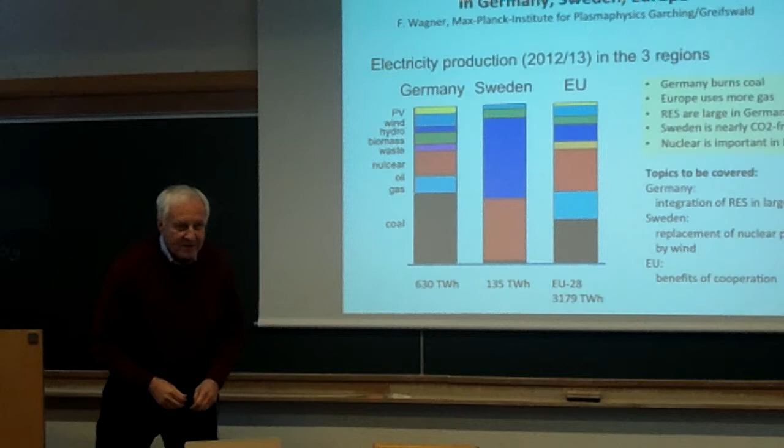In order not to disqualify myself in this seminar, I also would like to talk about EROI. EROI in the sense of energy, renewables, CO2, and intermittency. The original title I had prepared was the use of intermittent sources for electricity production in Germany, Sweden, and also Europe. So these are the three regions I would like to cover.

And here you can see the usual splitting. The 630 terawatt hours of German production is split up in coal, gas, nuclear, and so on. And this is the situation of Sweden, and this is then Europe. And what we can see is Germany burns coal. Europe uses more gas. Renewables are large in the case of Germany here. Sweden is nearly CO2 free because it combines nuclear and hydro, and then biomass. And nuclear is also fairly important in Europe.

And the topics I would like to cover are integration of renewable energies in large scales, at the example of Germany. Sweden, can one replace the nuclear power by wind? And Europe, what is the benefit of cooperation? A rather up-to-date topic.

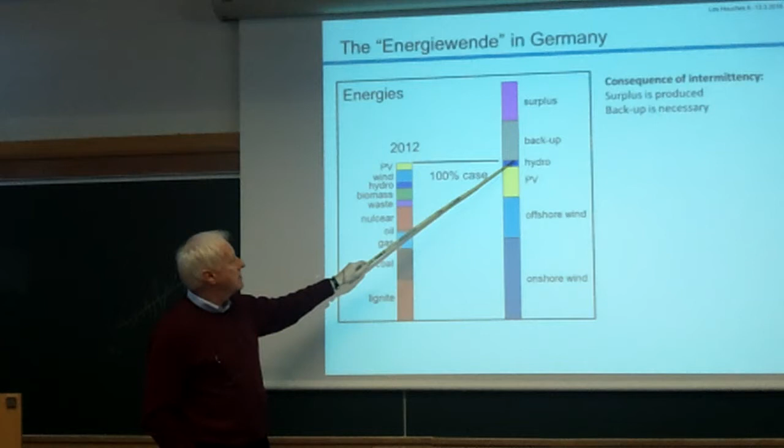So now let me turn to Germany, and of course everything goes under the headline Energiewende. This is again the situation I have shown you before. Now lignite and hard coal are split up. This is sort of the 100% case. And now this situation should be changed in the sense that we only use renewables. So we have onshore wind, offshore wind, photovoltaic. Hydropower cannot be changed very much in Germany. This is the level which, because I don't know it better, I just leave constant at the moment.

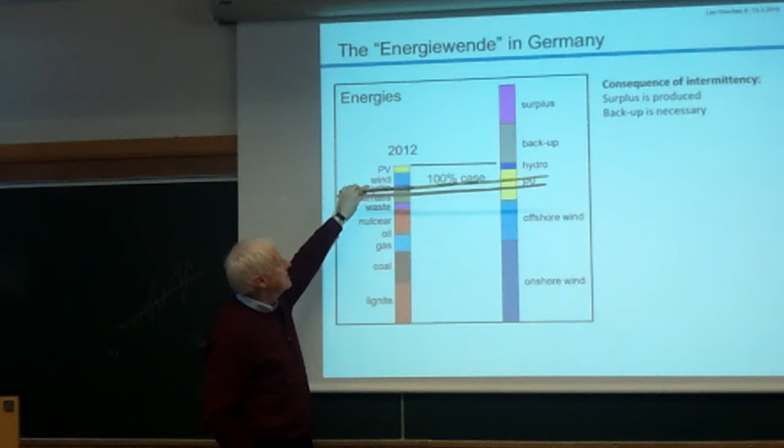And as these sources are intermittent, they will not always be present when needed. Therefore, we need a backup system. And then, if this is the 100% case, when I have voids, of course at other times I am producing surplus, so I have backup and surplus to consider under these circumstances. It has no scale, but it's in itself on scale.

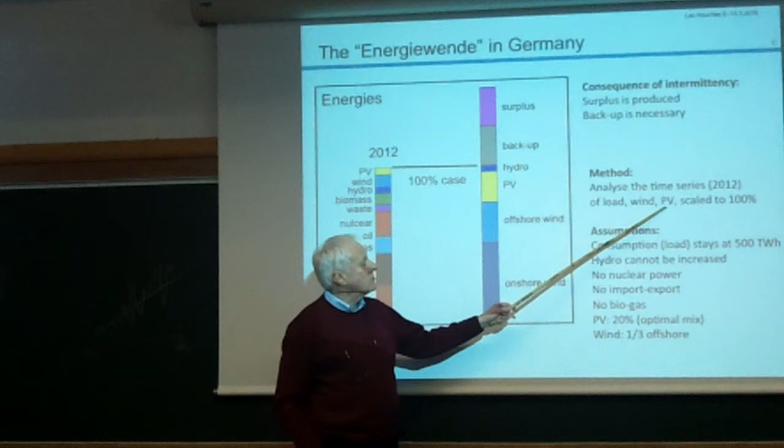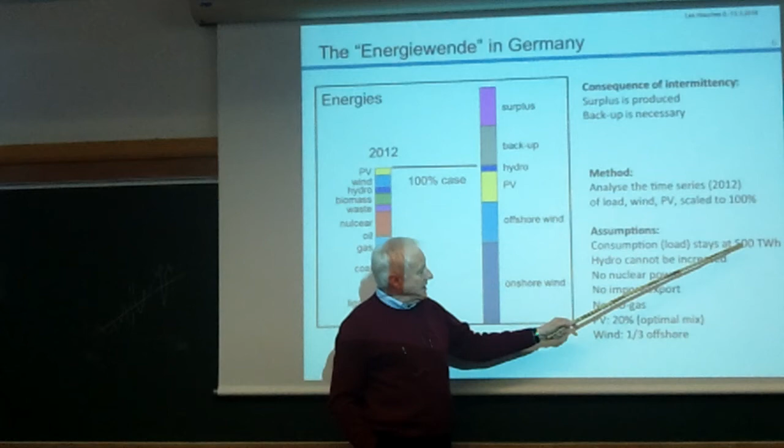The method, how I calculate those things in absolute terms, and you will see them in a minute, is I just use time series. I use the time series of 2012 for Germany, of the loads, wind, photovoltaic, and I just scale them to 100%. So photovoltaic and wind should produce the net electricity, around 500 terawatt hours. So this is what I would like to produce. This is my 100% case.

Hydro cannot be increased. No nuclear power. I consider no import-export. No biogas, because I am of the opinion that biogas or bioenergy has to be used for transportation eventually. Lorries and maybe aviation. I assume that photovoltaic is 20%. This is what is called the optimal mix.

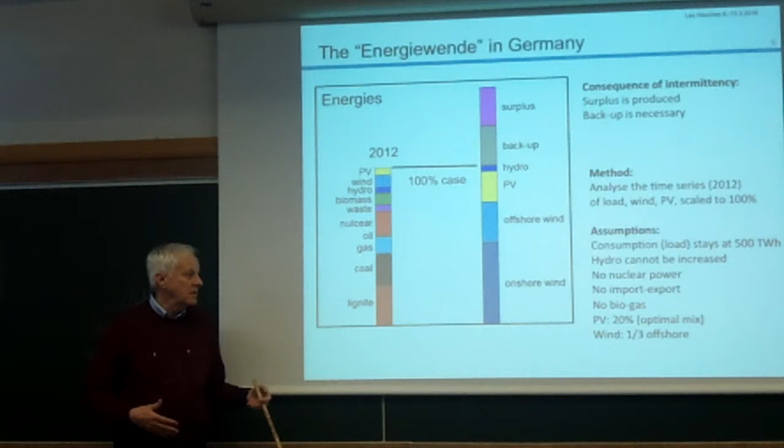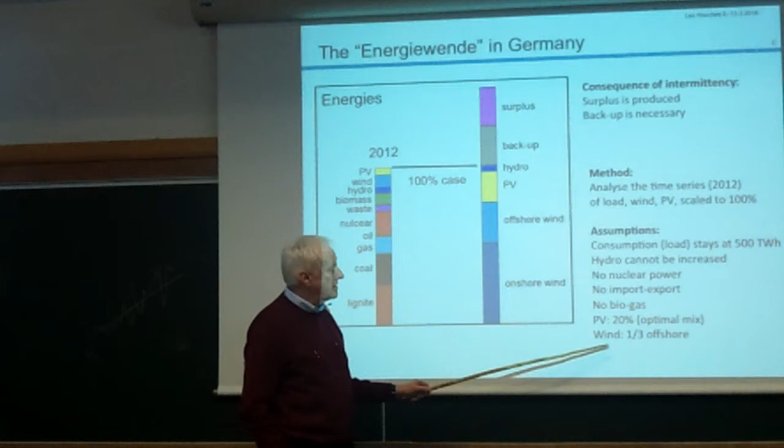So when you mix two time series, a periodic one which is photovoltaic and an erratic one which is wind, you can ask under what mixing conditions do I need the lowest level of backup? Then it comes to 20% photovoltaic, not more, in energy. Okay, arbitrary is the assumption in splitting between onshore and offshore wind. I assume that 1/3 is offshore. But this only enters at the end in the question, how much power do I have to install? Otherwise, it doesn't play a role.

So the major results are now when you ask simple questions, how much power has to be installed? Enough to serve Europe on good days. So when the sun is shining and the wind is blowing, with what we need for Germany alone, we could, on those days when the load in Europe is low, serve all of Europe. So the onshore wind is 176 gigawatt, offshore and photovoltaic. So this has to be installed for Germany to have, in my definition, the 100% case.

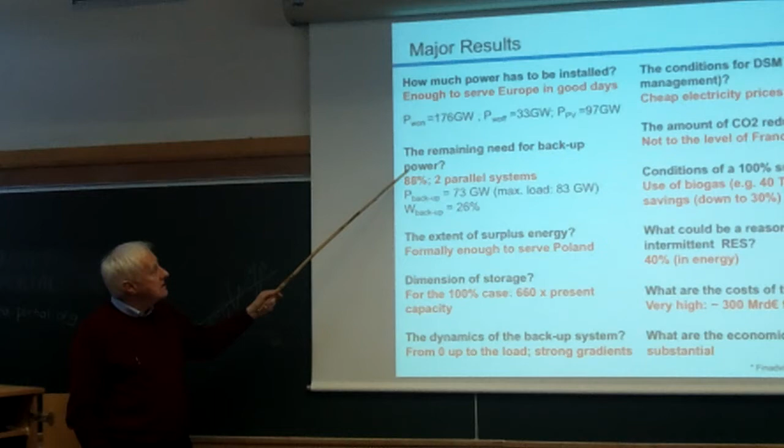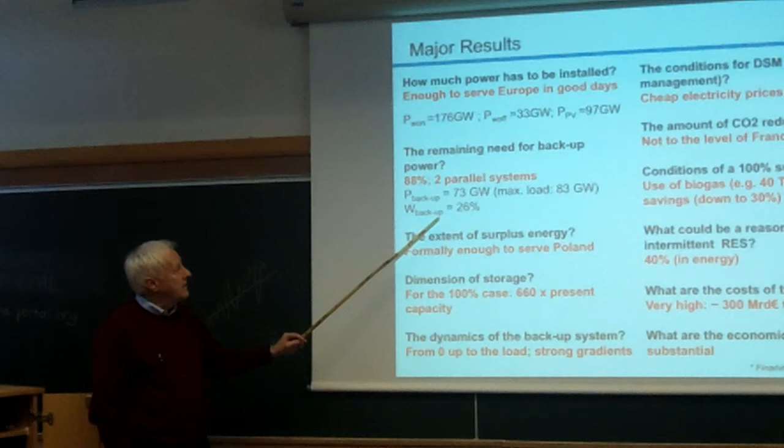But because we need a backup system, since we don't always have these good conditions, how much is the power of the backup system? It has to be 88% of what we have at the moment. So it is not that this drops to a very low value. Quite the opposite. We have to operate two parallel systems. So the backup power, which we need in addition to those, is 73 gigawatt. The maximal load in Germany is 83 gigawatt. And the backup energy on the other side is low. It is only 26%.

The extent of the surplus energy which is produced under these circumstances is, formally, enough to serve Poland. So it has a strong economic value, of course. Dimension of the storage: if we would like to get rid of the backup and replace it by a CO2-free storage, then for the 100% case, we need 660 times the present capacity which we have realized in Germany as

pumped storage. The dynamics of the backup system is totally different in comparison to the dynamics which these systems now have in operation, because now the dynamics goes from zero up to basically the load. So one has very strong gradients.

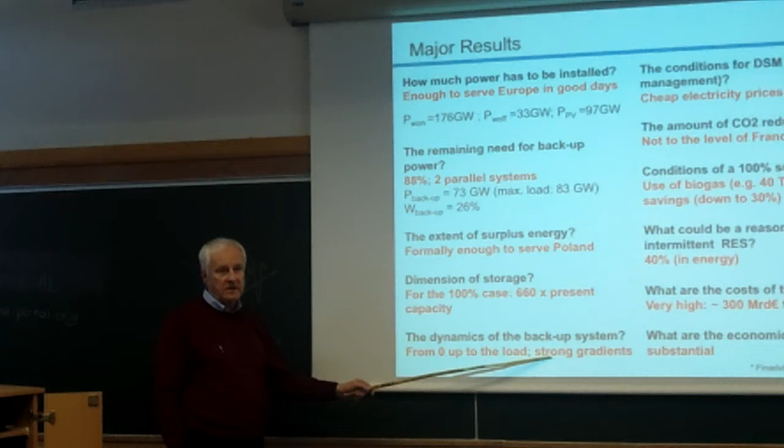The conditions for demand-side management: the cheap electricity price is during the day, not during the night. This is because of the 20% photovoltaic. So what you normally hear, that the clever housewife will have her washing machine switched on automatically during the night because one anticipates the price is low there, is wrong. Because of photovoltaic, the price is low during the day, which means that demand-side management drives us to utilize those periods where the economic activities are already large.

Or alternatively, the most obvious thing is to integrate Saturday and Sunday, because wind is blowing, sun is shining, we only don't consume so much. So let us consume so much and give up our weekly organizations. The amount of CO2 reduction under these circumstances of the 100% case is not to the level of France and Sweden, which enjoy the combination of hydro and nuclear.

The conditions for 100% supply by renewable energies, because many studies quote this possibility. This is the use of biogas, which I did not consider. In Germany, we have 40 terawatt hours now produced as biogas under circumstances where our biodiversity is already strongly, visibly reduced. But nevertheless, under these circumstances, you need drastic savings. Normally, people don't say savings, but rather efficiency improvement. This is more popular. Savings down to 30%, not by 30%, but down to 30%.

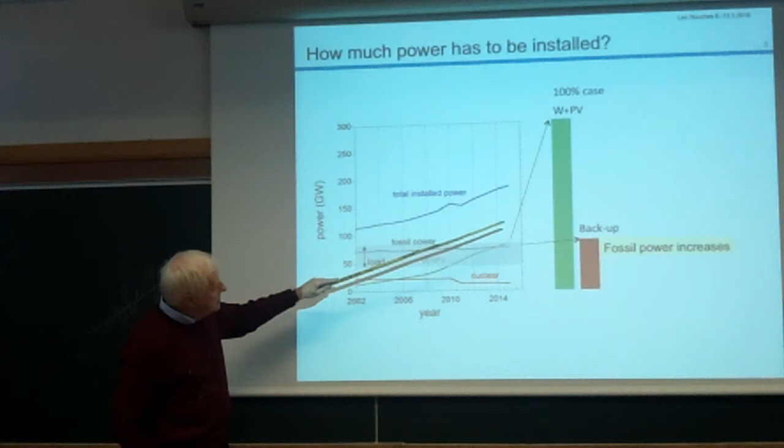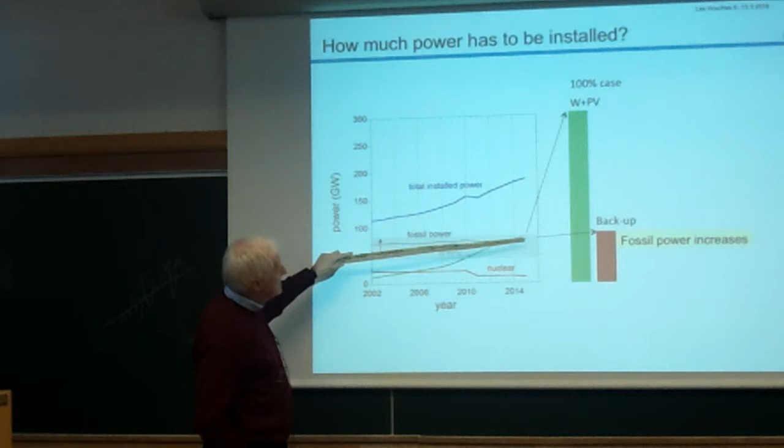And now you can see already that in the German case, the installed power corresponds to the peak of our load. So we have now something like 80 gigawatts, 40 gigawatts photovoltaic, 40 gigawatts wind. So this is tremendous. And it is already more than what we now have in fossil power. And this is the sum, the total installed power, which increases. This is the situation now where we get something like 20% from wind and photovoltaic.

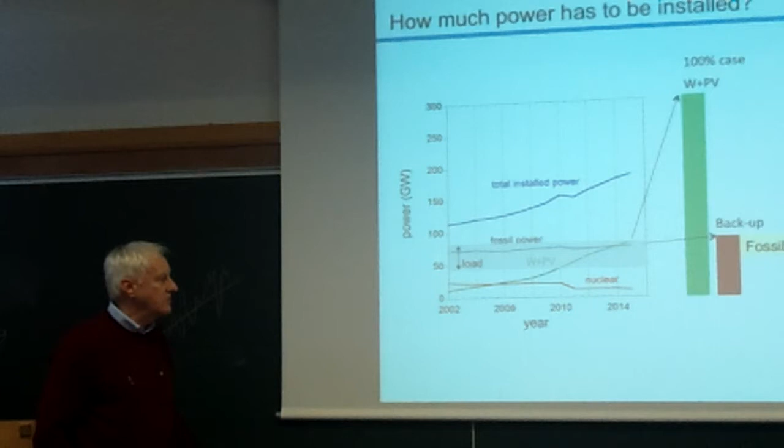But if you now scale up those two, because the rest, hydro and biomass, you cannot scale, then ultimately you must go from here to here. Then you have the 100% case. Then you produce this target, which is 500 terawatt hours, which I quoted. Very short. Yes, 100% is 100% of the electricity comes from renewables.

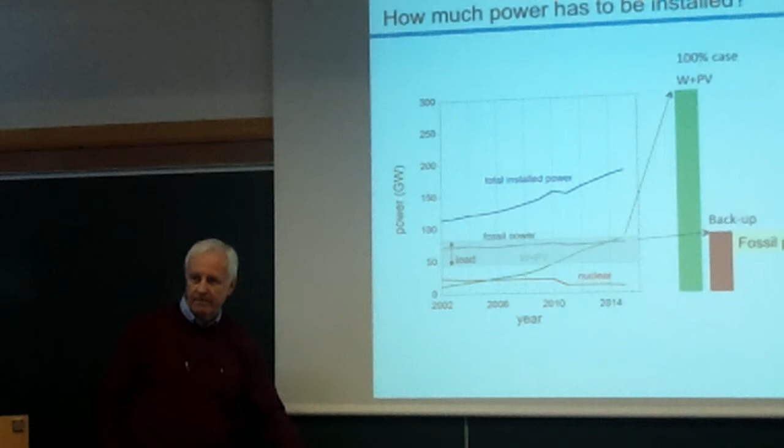Yes. So why do you need backup? Why is there fossil backup? Because part of this 100% is surplus. Okay, so you don't consume 100%. Yes, exactly. You export some. Or whatever you do with the surplus, we will come to this.

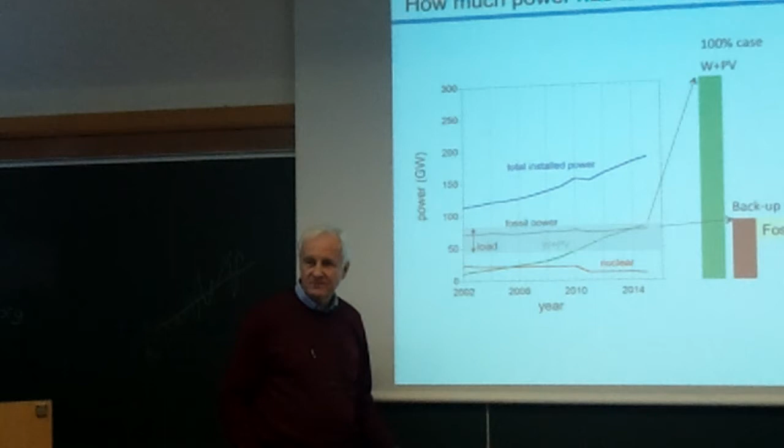Okay, so you need the backup in addition. So this is the 100%. So you need, for the 100% case, a power, I'm talking about gigawatts here, going from here to here. So despite the fact that we have already invested a lot, of course, we have not reached the real final destination. We still have to develop these things quite a bit. And in addition, we need, for the 100% case, still the backup system.

And it is interesting because we are switching off the nuclear. We have to ultimately increase the fossil power as long as we don't have any other possibilities, because we need more power than we have at present.

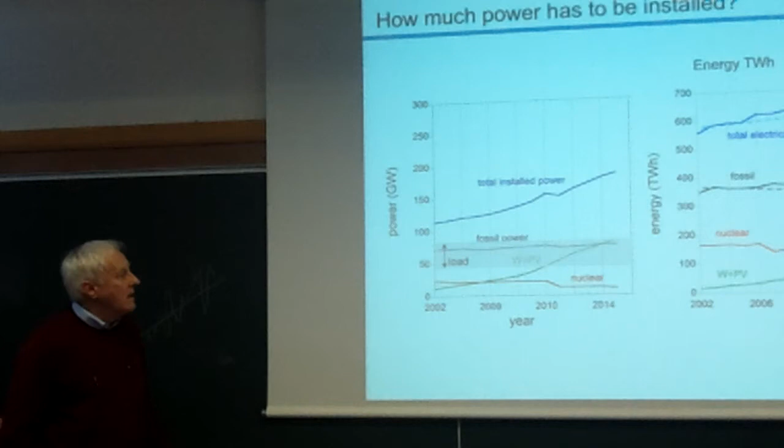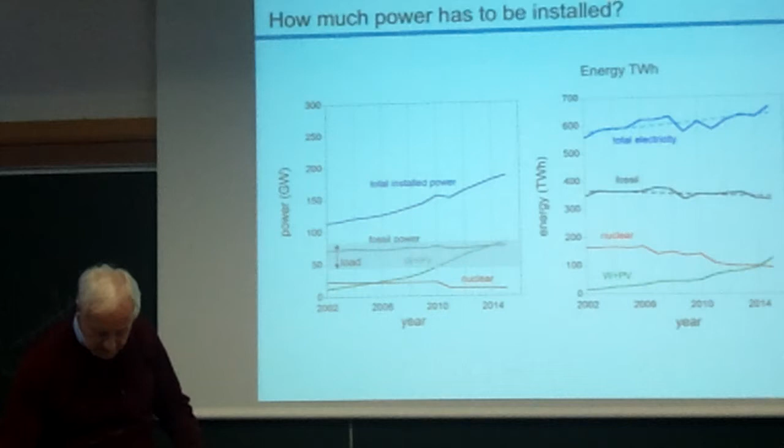This is now power, and this is the energy which we are producing. So when we look at the nuclear, it is continuously going down in energy. Wind and photovoltaic are continuously going up, and now we are producing more energy by wind and photovoltaic than by nuclear. The fossil energy contribution is slightly going down, but the total electricity consumption, so this is the total value. My reference value is 500 terawatt because of the net electricity, the consumed electricity, not the produced electricity. So this increases slightly.

Now the extent of surplus energy. So Germany exports, and this of course is not the surplus. It is just how the system operates in this intermediate phase where renewable energies are continuously added. Under these circumstances, the question is, can the fossil power stations now totally be switched off and regulate 100%? No, they cannot. There is always the issue for the operator to go through this calculation. Is it better to nevertheless run the coal-burning power station because it's more costly to switch it on again, and so on? So this all enters.

Sorry? This is all Germany. Germany. All Germany. At the moment I'm talking only about Germany. Okay.

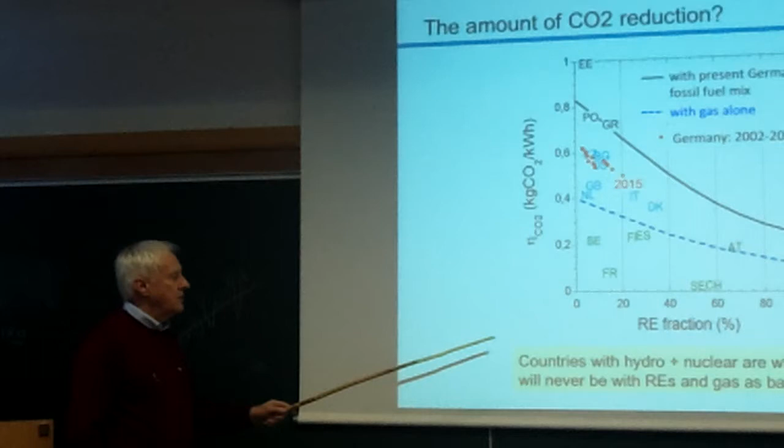Okay, so the next topic would be CO2 reduction. So this is discussed in terms of the specific CO2 production or emission for electricity production. So it is kilogram CO2 to kilowatt hours. And this is the renewable energy fraction. This is now, the black curve represents the German situation when we increase the renewables from 0 to 100%, utilizing now the mix which we have in lignite, coal and gas, disregarding nuclear energy.

So Germany is not there because thanks to nuclear energy we are down there, and thanks to renewables, now we move in this direction, we are 2015 here. But if we would replace nuclear energy by our conventional mix, we would follow along this line. When we now would give up nuclear but replace everything by gas, we would march along this line. When we look at what happens in Germany at the moment, thanks to the growth of renewable energies, we are walking down along this line.

And now, of course, when we go up to the 100% case, we ultimately should end there if the rest of the backup system is gas, or we end up here if the rest of the backup system corresponds to the present mix between coal and gas.

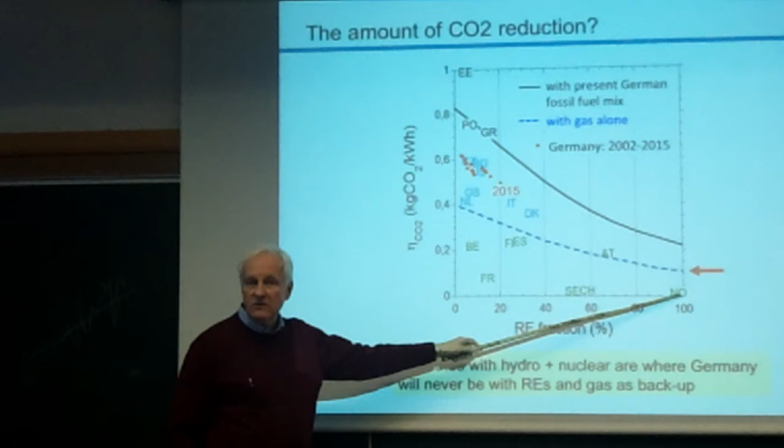Okay. Now when we look into others, this is Denmark, Belgium, and these are the interesting countries, France, Sweden, Switzerland and Norway. Now here we have 100% hydro, and here we have the mixes there. So Germany, with all the efforts to go to renewable energies and gas, will not be able, let me say, to meet the CO2 situation of those countries, which they have already now, because they can work with hydro or hydro plus nuclear.

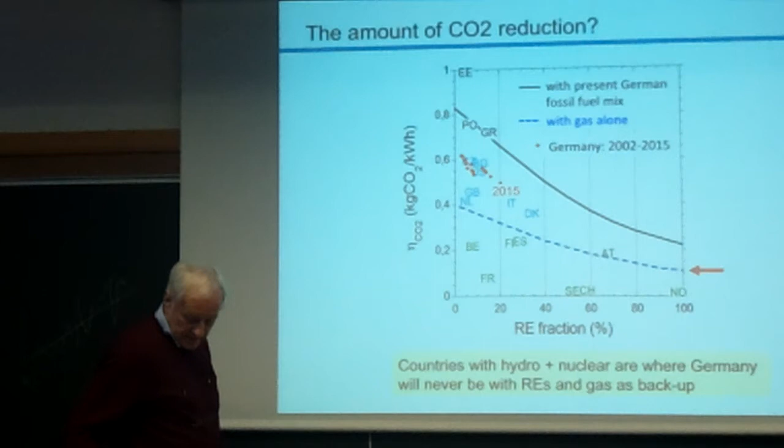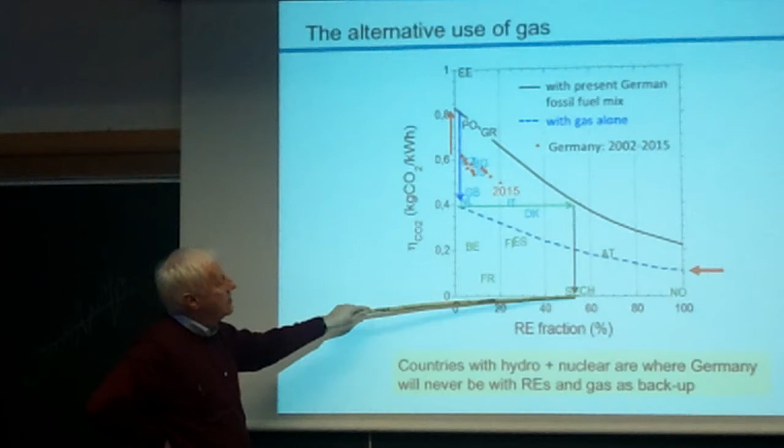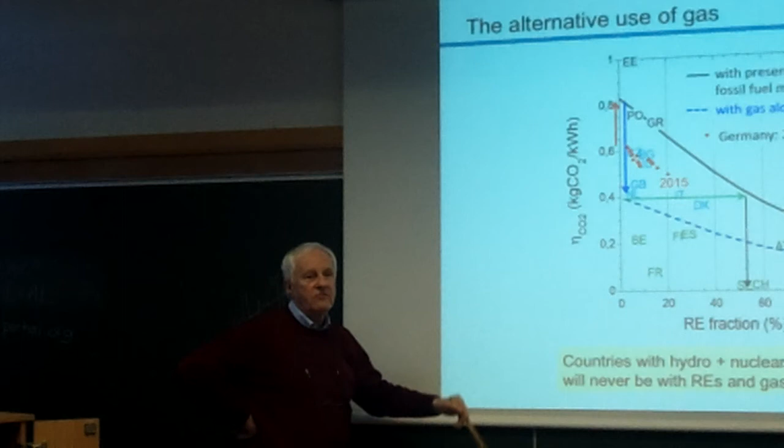Another aspect here one can see if one wants. If Germany, let me say, what we want to do, switch off nuclear, if we had done this right away, we would have marched up here. Now, if we had switched instead of coal to fully gas, we would march down here. So we would have ultimately reached a level which corresponds to the use of renewable energies up to a fraction of 50% or something like this. So the replacement of coal by gas is tremendous, corresponds to quite a substantial share of renewable energies. So this would have been an alternative.

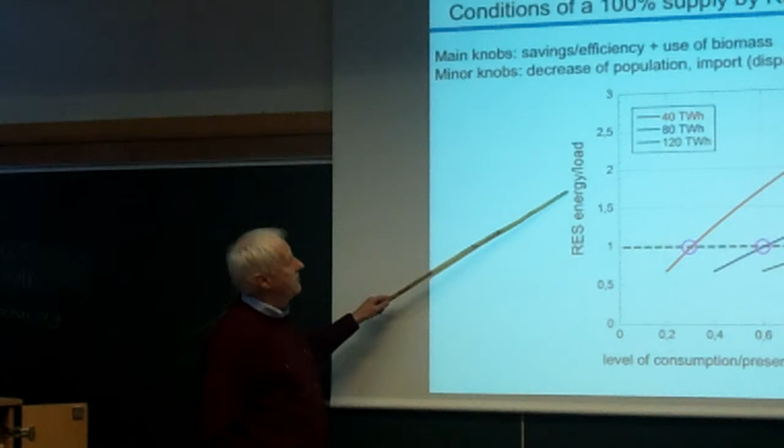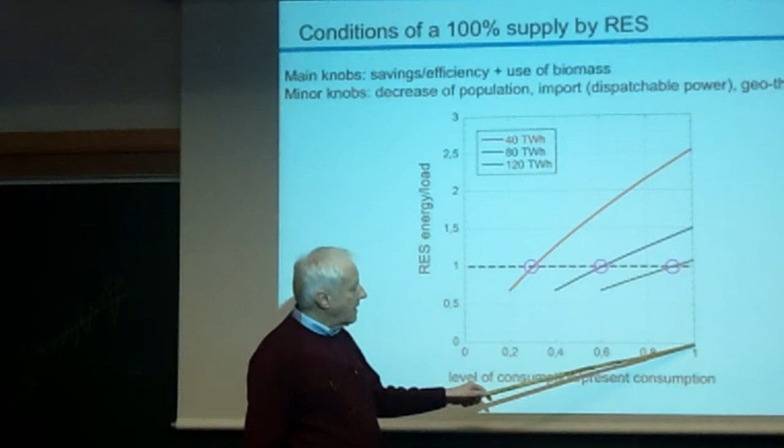Now the conditions for 100% supply. So 100% supply, now when I have the renewable energy divided again by the 500 terawatt hours, my load here, then I would sit here at 1. And here this is plotted against the level of consumption compared to the present consumption. So the present consumption is here, 1. And this is my parameter here, the use of biomass in the form of biogas to produce electricity.

So at present we have 40 terawatt hours in Germany. Then if we use this now to regulate the fluctuations which we have, then we can meet this point 1. The renewable energies indeed fulfill the load when we reduce our consumption down to 30%. When we double this, but then we need a colony to get the biomass, then let me say we only have to reduce to 60%. And only when we triple it, then we are where we are now.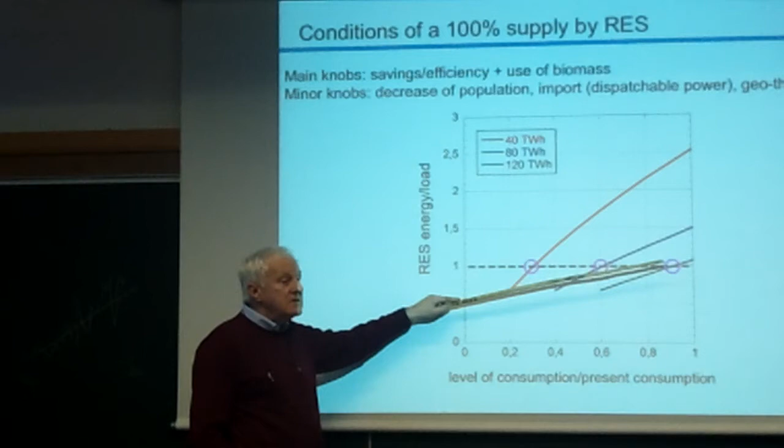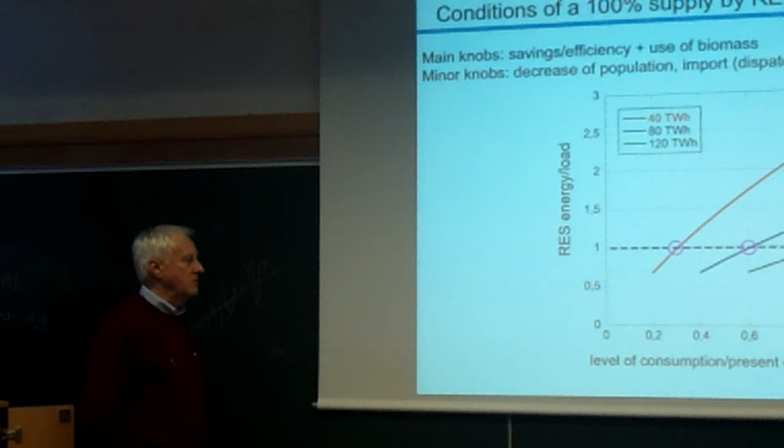Then if the dynamics of those systems would allow it, then with 120 terawatt hours, we would be able, let me say, to meet our consumption with renewables alone. Then you can say, of course, yes, okay, then let's just produce more renewables. And maybe then the situation is better.

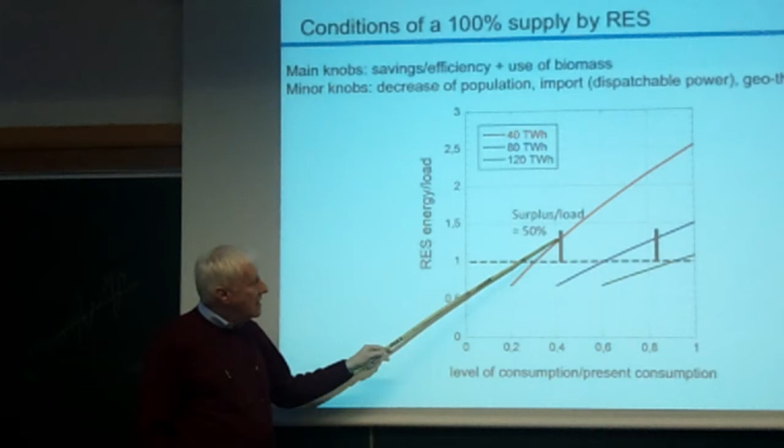So when I do this, then, for example, I have a special point here, because under these circumstances now, the surplus corresponds to 50% of the load. So I improve a little bit, I have not to be so ambitious in savings here or here, but nevertheless, very quickly, the surplus which I produce increases so much that I can think this must be an economic limit, where it just does not make sense to go beyond it.

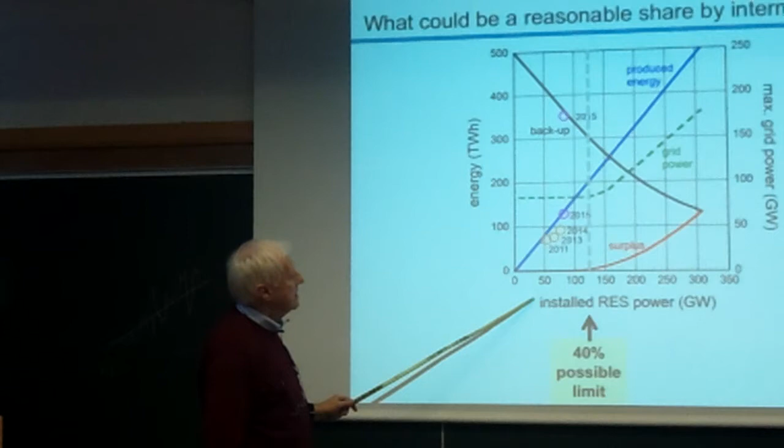Okay, so what could be a reasonable share by intermittent renewables? This shows now the energy which is produced. Here now we have the 500 terawatt hours, which is my goal. Here is the installed renewable energy power. This is now the produced energy against the power, which I assume is linear.

Of course, in reality, it will not be linear, because we will just not have these preferential sites for wind energy. If we would like to go to these values, we have to go deeper into the country where the wind does not blow as much. So in reality, this line will be non-linear, deviate from it. This is the variation over the various years, our installed power. So I said we are now at 80 gigawatt, and this is what we produce here.

Okay, now this is the backup system. Here we are at the moment. This is what we need. These are the calculated curves. And here is then the 100% case, where the backup and the surplus just meet, per definition. Okay, and now I can say, where do I think that circumstances become critical?

So here, shown on the right ordinate, the grid power increases with this share. And the surplus production increases. So here I have a technical problem, and here I have an economic problem. The economic problem is what to do with the surplus. So around this level, around 40% or something like this, the problems might start. Of course, this is very vague, but this is what I would deduce.

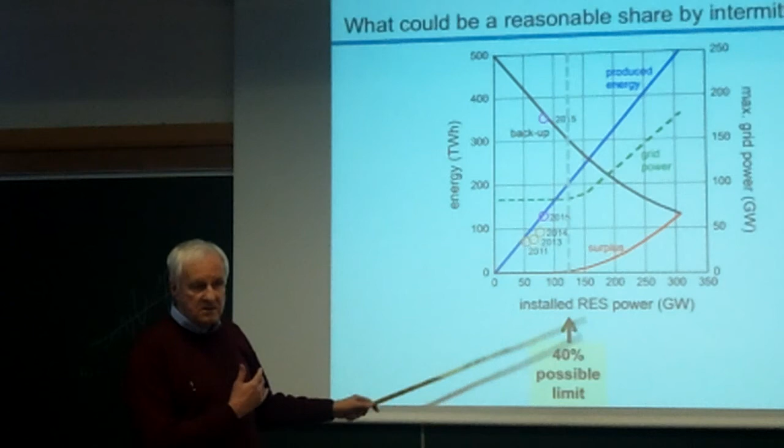When I look at the situation of Denmark, or maybe more critical the situation of Ireland, I can recognize that these problems indeed happen on days when they have something like 40–50% production. Ireland is more critical because Ireland is an island indeed, not hooked up like Denmark to another grid.

So the feed-in tariff for 2015 is 24 billion euros. This is a figure, and I'm very astonished that this figure is not discussed in detail, for example, in Germany. But when you compare it with other figures of relevance, for example, energy research in Germany, which, as far as it is publicly financed, is something like 800 million euros. So there's a large discrepancy. Our budget for research at all is 15 or 14 billion euros in comparison to the 24 billion euros. So this is very strange.

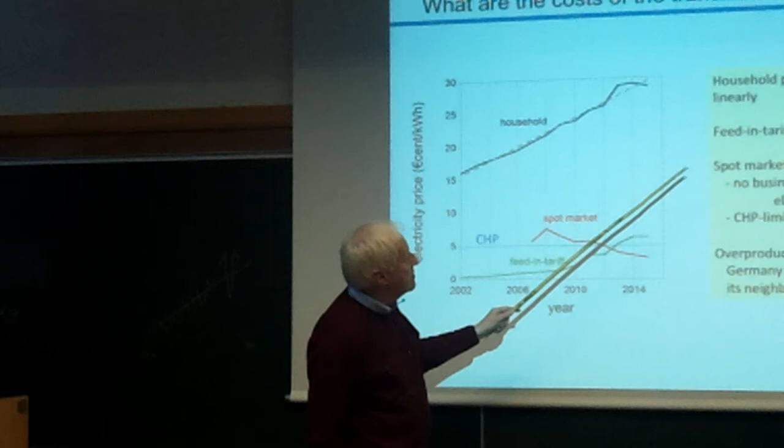Okay. Feed-in tariff, it's 1/3 of the global increase? It is, this is the household price, yes. So you have something like 50% is tax and feed-in tariff, and the other 50% is production, transportation. But feed-in tariff, it's 6 cents per kilowatt-hour, and the global increase is 15 cents per kilowatt-hour. What is the rest? I see. What is the rest, you think?

Okay. So you have a continuous increase of other elements. For example, in this price, you have maybe 8 or 10 individual components. You have the production, you have the transportation, you have expenses for the communities because they have to take care of the grids. You have expenses for new grids to be built. This is all paid by the consumer.

Then you have an eco-tax, which is a general tax. Then you have the Mehrwertsteuer, whatever the English term for this is. Okay. So it is a very complex thing, and this was continuously increased. And the one driving element in the last years is the feed-in tariff system, and this 6.3 cents per kilowatt-hour add up to 24 billion.

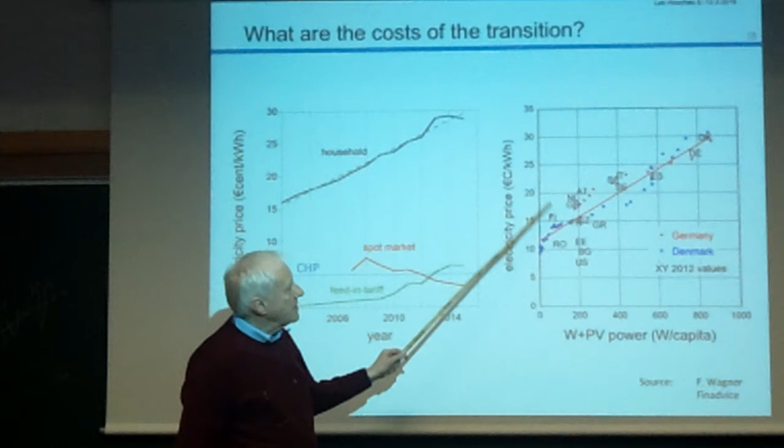So when you look at the electricity price now and plot it against the wind and photovoltaic power in watt per capita, then you can compare different countries. Here you can see the European countries, and Germany and Denmark, with the highest shares, have the highest prices. So this is the price which you simply have to pay when you would like to make the transition. And here you can see in red the time development for Germany, and in blue the price increases in Denmark. So this all shows a very high correlation.

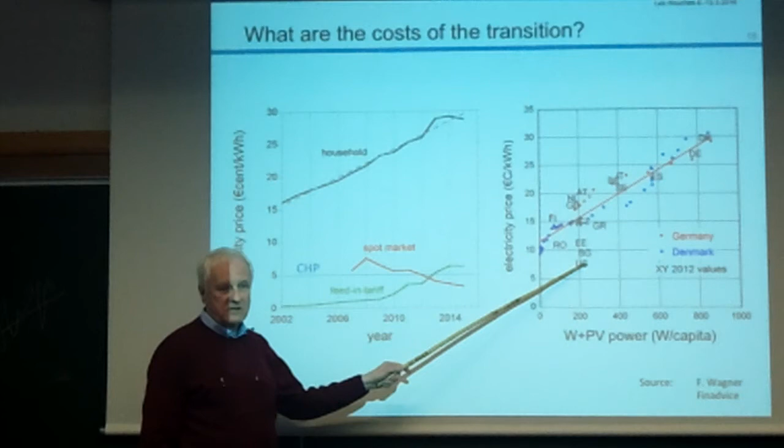And it is very clear, if other countries would like to start here and go up there, France here, go up there, what they have to pay. And here's the US price. This is, of course, our strongest competitor. And this difference in price is meanwhile quite crucial, I would say.

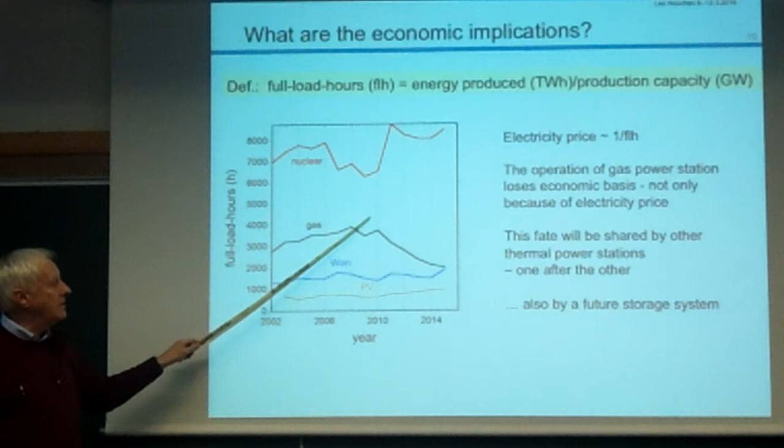So what are the economic implications? I can discuss this in terms of the full load hours, which is the energy produced against the production capacity. This is something which ultimately enters the price structure. The full load hours of nuclear are high, continuously there. The full load hours of gas are going down. And this route rules out gas power stations in Germany.

So we have in Irsching the most modern gas power station in Europe, and it has not been operational since 2011 or so, because it is economically just not justified any longer. So this is the consequence. And then, of course, because of the fluctuating nature, the full load hours of wind and of photovoltaic are very low. Now we are having more offshore wind, and here the full load hours will reside somewhere up there.

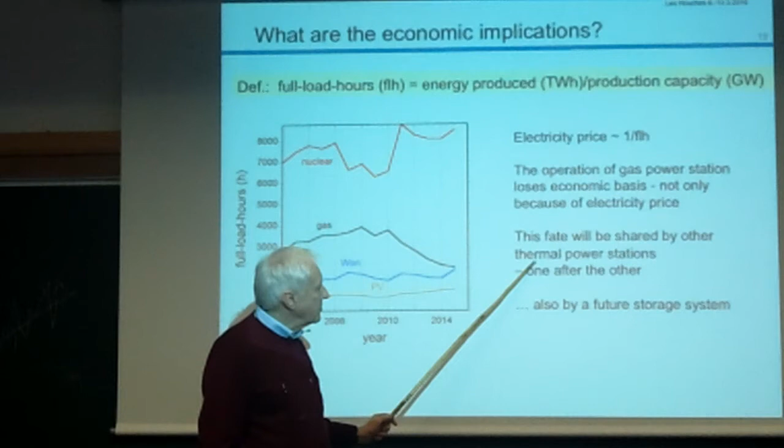Okay, so the operation of gas power stations loses its economic basis, not only because of the price. This fate will be shared by other thermal power stations also, one after the other, and finally also by a future storage system. It will be subject to the same economic rules. So the storage system, whatever it is, hydrogen, power to gas, will be extremely expensive, but the economic operation will not be viable.

Coal? Coal is typically around here, and it is also gradually declining. I showed it with gas because here the effect is directly observable, because gas does not operate any longer. You could also show it, for example, with pumped storage. Pumped storage, not only in Germany but also in Austria, which is one market, is getting problems, because they operated at the high price level around noontime at peak demand, and now there is photovoltaic.

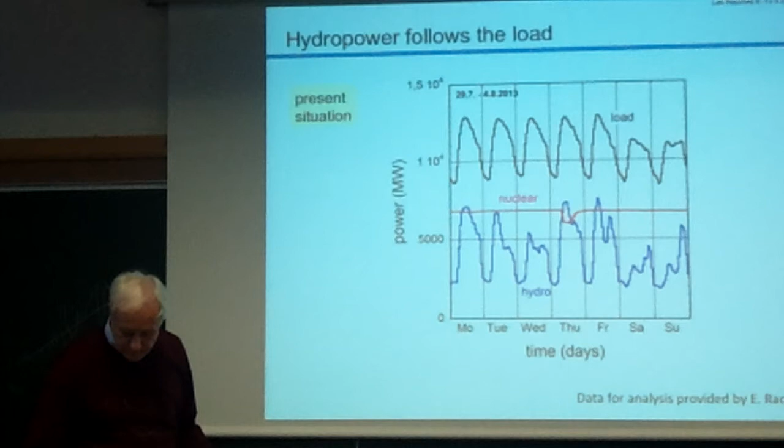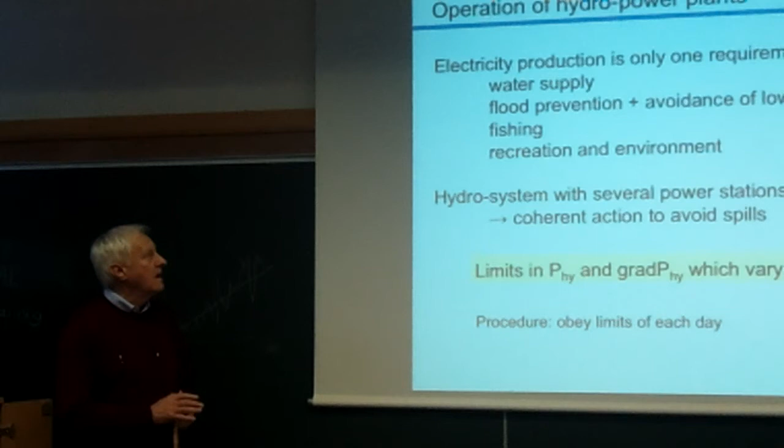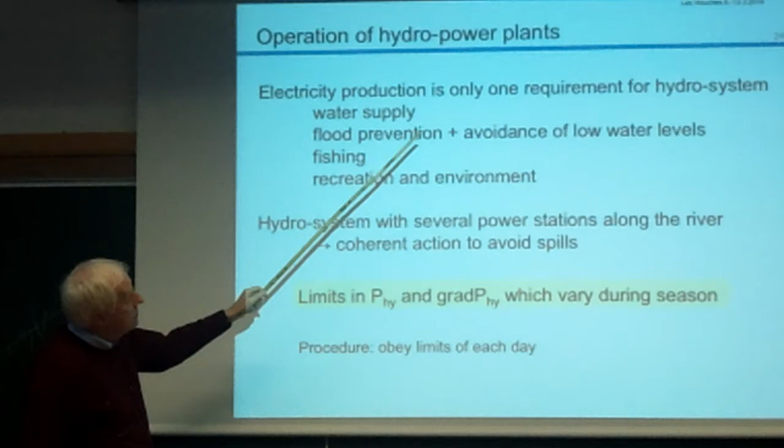Now, the operation of a hydropower plant is not very simple. It is not straightforward. So they can regulate the load, but can they do more? The situation is that a run-of-river power station in a river, or this whole hydro system, has also other things to obey. It has to take care of the water supply, flood prevention, avoidance of low water levels, fishing, recreation, and all these things are basically fixed in laws. So there is no flexibility.

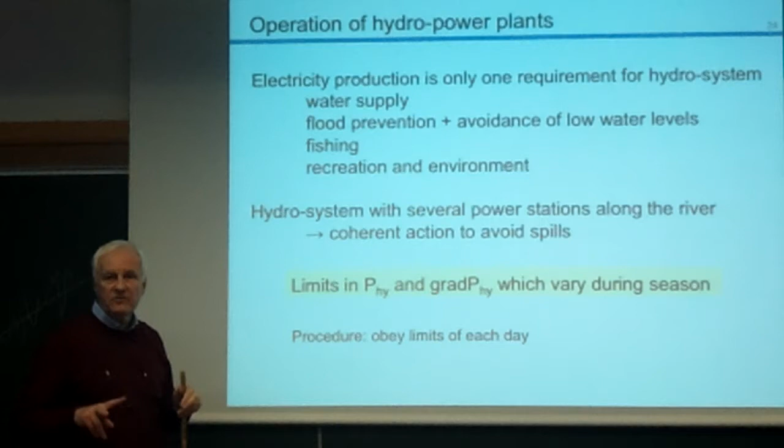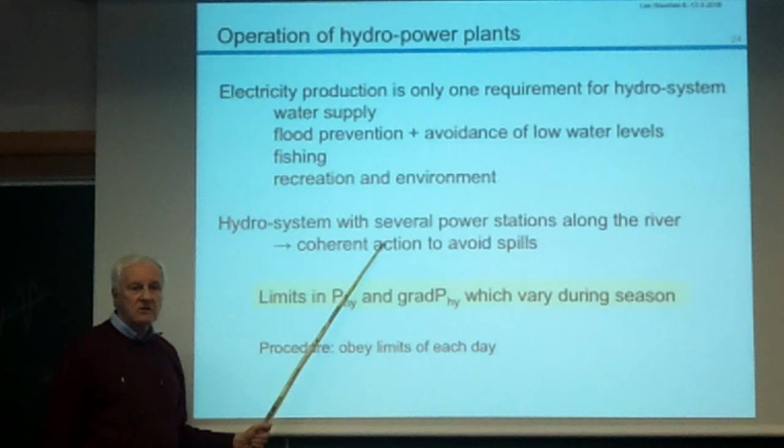And then a hydro system has several power stations along the river. So in Sweden they have basically 2 rivers, and along this river, there are the various power stations. So therefore, these power stations have to operate in a coherent fashion to avoid spills. So if somebody further up, closer to the source, opens now, produces electricity, then a water wave goes through all the other power stations. And when it is there, the question is now, should it produce electricity? This depends on whether you need electricity. Otherwise, it's a spillover and an economic loss. So the whole thing has to operate in a very coherent form.

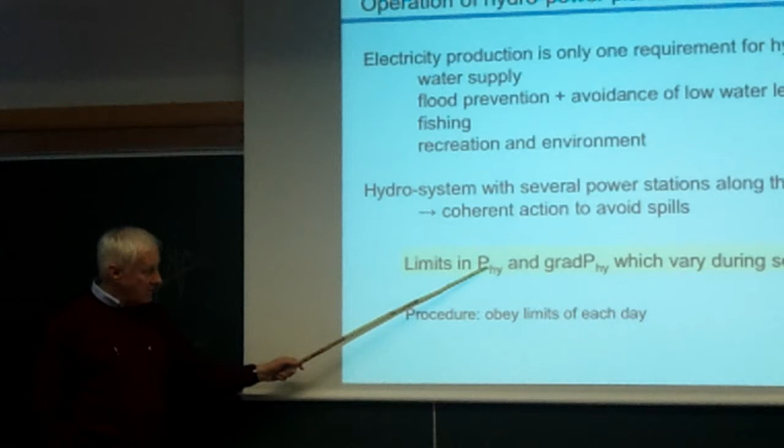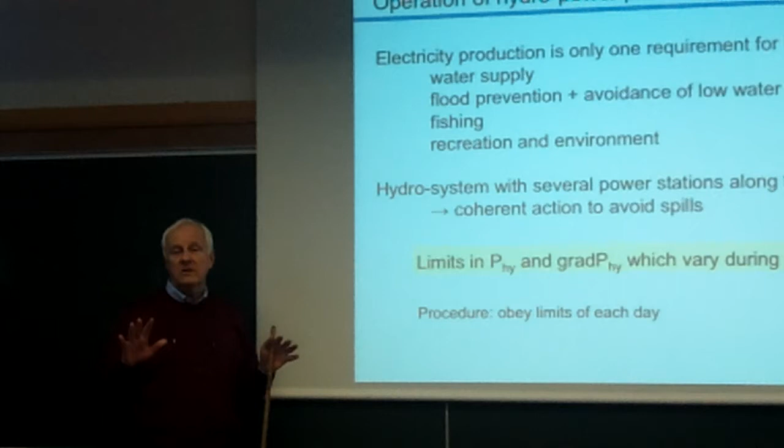And this means that there are limits for the power from hydroelectricity, but also for the temporal derivative of this power. Both, and they vary during the season. Because of course in late spring, there is a lot of hydropower. Later in fall to winter, there is only little hydropower. So this is, at the end, a complex situation.

Now, when they would like to increase the wind, then they can decrease the nuclear power. They need, of course, much larger installed power, because the full load hours, or the capacity factors, are different, and they need a backup system. If a gas backup system is used, and this is necessary for the dynamics, the specific CO2 emission increases by 50%, which of course is not favorable. Photovoltaic is rather ineffective to replace the backup system in Sweden. So this is not a solution.

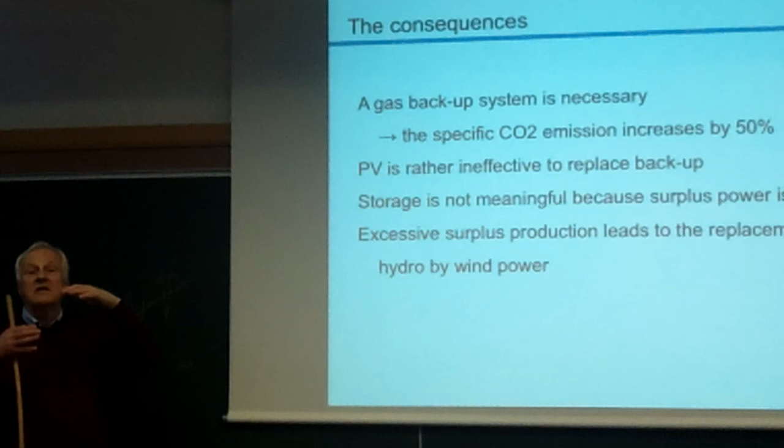Storage is not meaningful in Sweden at all for this sort of internal operation, because hydro, of course, smoothes out the wind to a certain extent. So you are producing surplus at a much lower level. And therefore, if you don't have surplus, you cannot put something into a storage. Therefore, the storage is not meaningful.

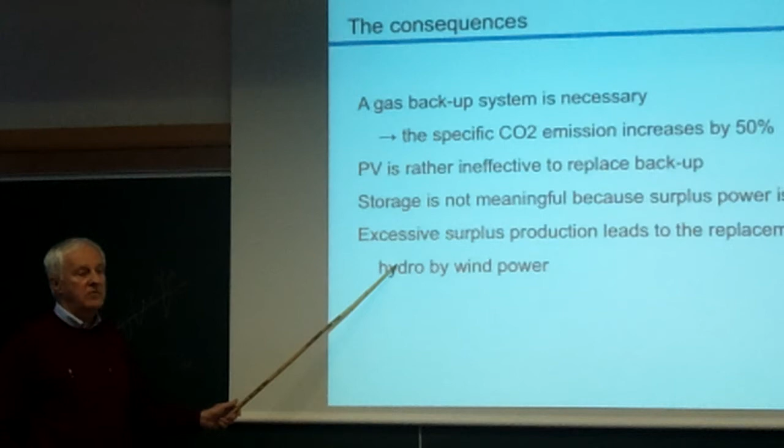Excessive surplus production, when you produce more wind than necessary, then very quickly you reach the point where hydro is replaced by wind. So you are replacing a controllable renewable energy form by a not controllable one, and of course nobody would do this.

The benefits now of an EU-wide renewable energy field. So I have data from Germany, wind and photovoltaic; Denmark, wind; Belgium, wind; France, wind and photovoltaic; UK, wind; Ireland, wind; Spain, wind and photovoltaic; Czech Republic, wind and photovoltaic; and later I got data from Sweden. So for each of these countries I can prepare a model in the sense that it is self-sustained and works under this 100% condition by itself. And now I can utilize this national renewable energy field and combine it into a European one. And then I can compare the situation of this European-wide renewable energy field with a national one for each of those countries. My reference will be Germany because of a lack of time.

So when you now look at the smoothing effect, because of course you would expect that things are smooth under these circumstances when you have contribution from Spain and the Czech Republic on the other side and so on, then I can demonstrate where actually is the smoothing effect. I can first compare the duration curve for the loads between Germany, which is dashed, and Europe, which is solid. And you can see that the demand is basically the same, because Europe is one economic unit. So the load, our demand, will not average very much.

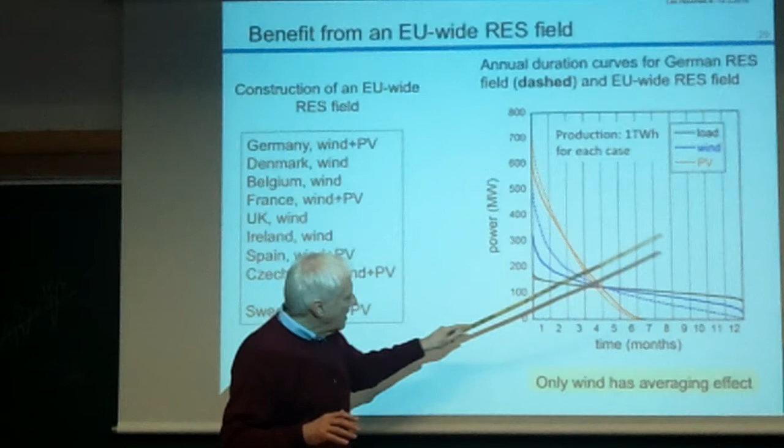Then I can do the same thing with wind, and here I get the averaging effect, because this is the situation of producing 1 terawatt hour in wind for Germany, and this is when I use the European renewable energy net. And this annual curve is much closer to my demand curve. So this is the benefit which I have. So it is only the averaging of the wind which would help when Europe cooperates, because then I get a supply situation which is closer to the load, which means that surplus and backup are reduced.

So what is Germany's benefit? This can be done for each of these contributing countries, and I did it for all of them, but what is the Germans' benefit when they replace the national field by the EU-wide field? Then the backup energy is reduced by 24%, the maximum backup power by 9%, the surplus power by 15%, the grid power by 7%, the typical grid fluctuation level 35%, but this is a long debate, so we should not go into this. And the maximum storage capacity quite substantially by 28%. So there is a benefit, but not all countries have the same benefit. It's a benefit for Germany? Yes, this is what I say here. Germany's benefit. Not each country has the same benefit.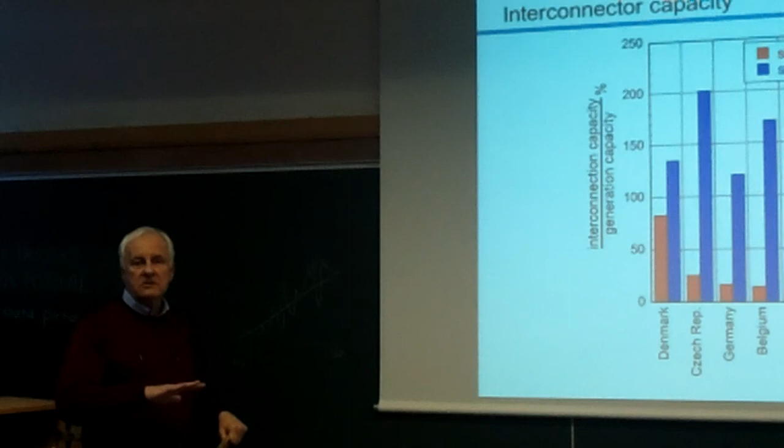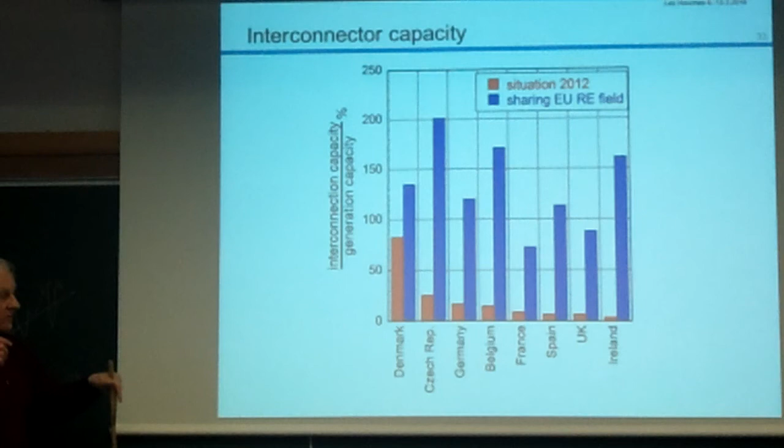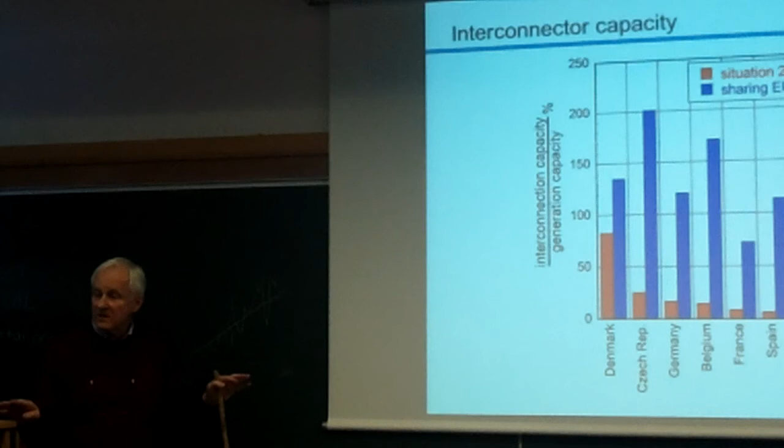Okay, when one would like to ultimately utilize the European possibilities, then of course one needs the corresponding interconnection capacity so that I have a copper plate situation for Europe. In red I have the actual situation, in blue I have what I would need. And this is again normalized against the generation capacity. These values are higher than the generation capacity because this system operates on surplus. As long as I don't have surplus, I use it myself because I don't have another possibility. Only when I have surplus can I give it to others via the interconnectors. So the surplus has high power levels and therefore the interconnectors have to cope with this.

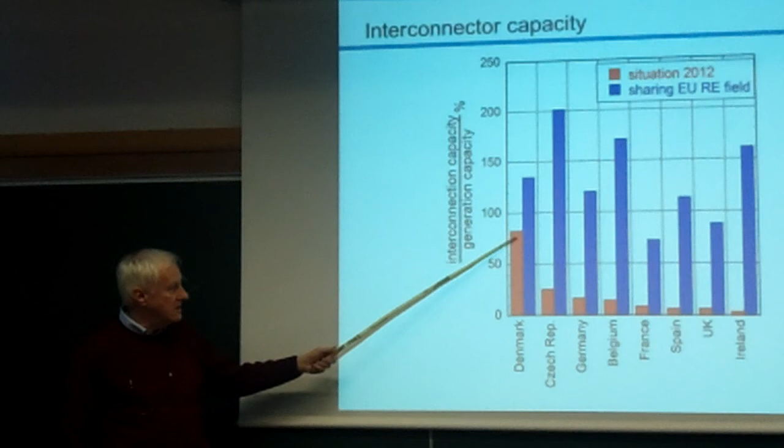Of course, nobody will realize this. But this means that we will not be able to exchange power so freely in Europe. And it also means that we will have surplus which we cannot use. Okay, so Denmark has a high interconnector capacity. They only have to increase a little bit because they are already embedded into their neighbors. This is their tremendous advantage. So they took care that they are not alone. All the others have to increase it drastically.

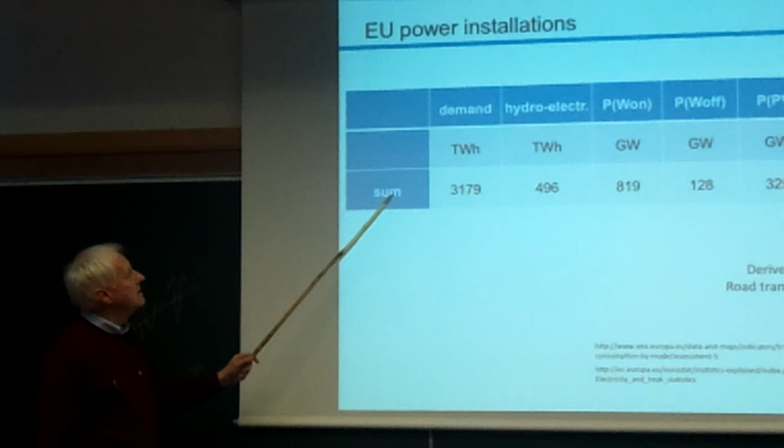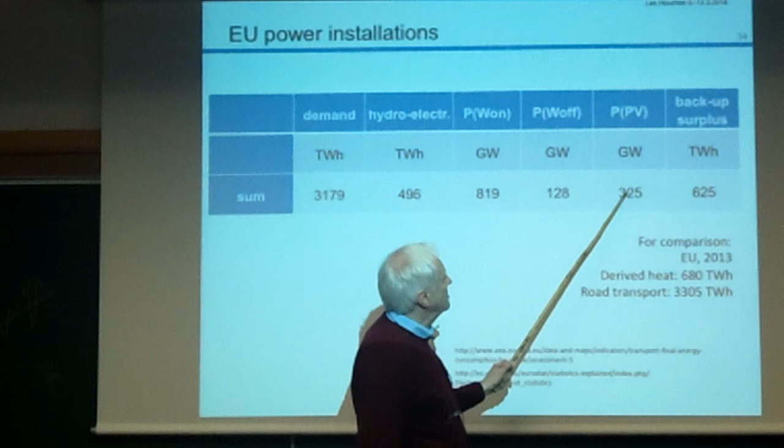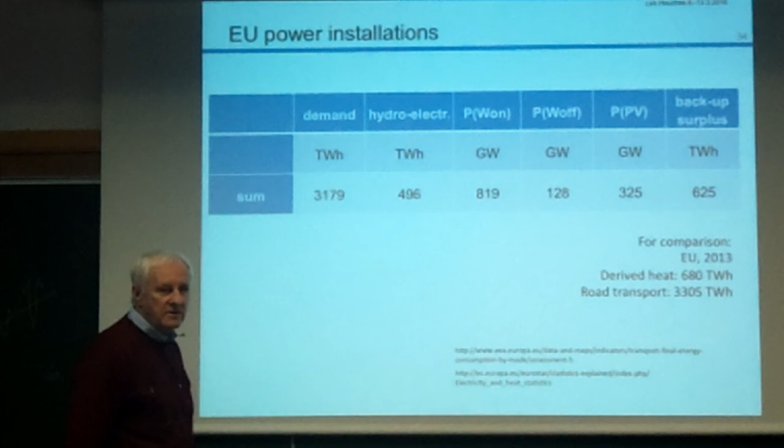So when we ultimately put the whole thing together, the demand of Europe is this value. This is the existing hydroelectricity. Now, if we would like to have a 100% case for Europe, this is the onshore, this is the offshore wind, this is the photovoltaic, again under my 20% law. And this is the backup energy which we still need, or correspondingly the surplus which we still produce under these circumstances. What to do with this? Of course, it is very difficult because it's very erratic.

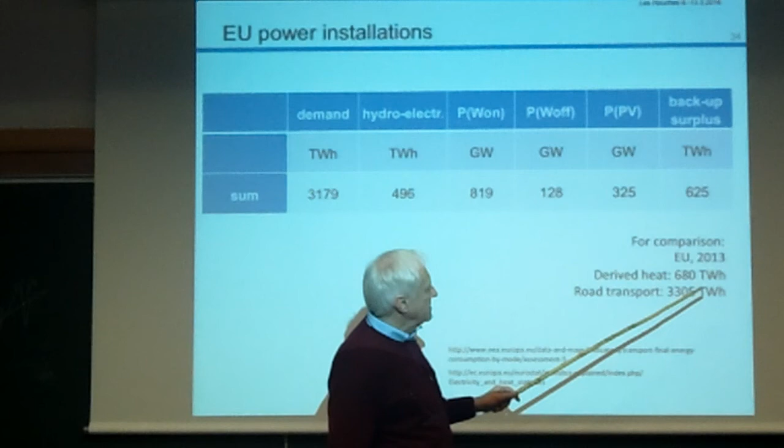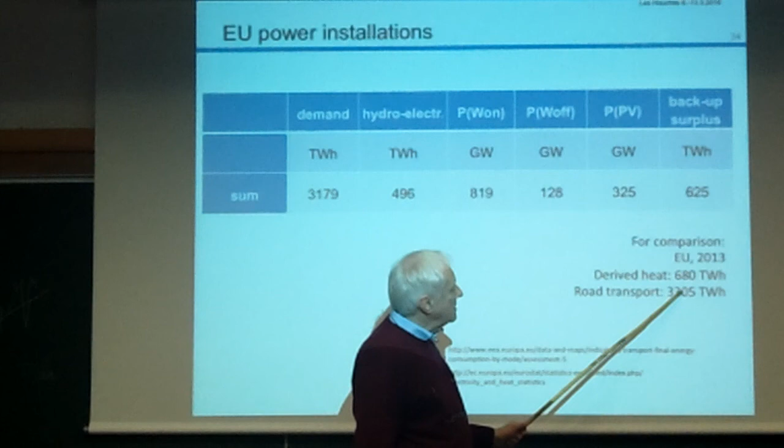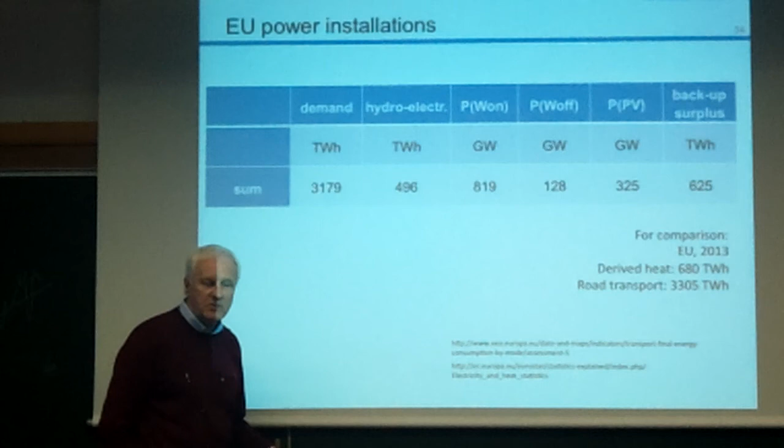But nevertheless, just to compare figures, the derived heat which we need in Europe corresponds to this figure. The road transportation is much higher, but when we compare the efficiency of an electric car to a regular fueled car, then it comes also in this order of magnitude. So in principle, numerically, one can do something, but of course then you must organize it, how to cope with something which is so highly erratic. And now I'm done. Yes.

Yeah, okay, here's my final one. If you... okay, maybe we go to the discussion. You start the discussion and I look for the last thing here.